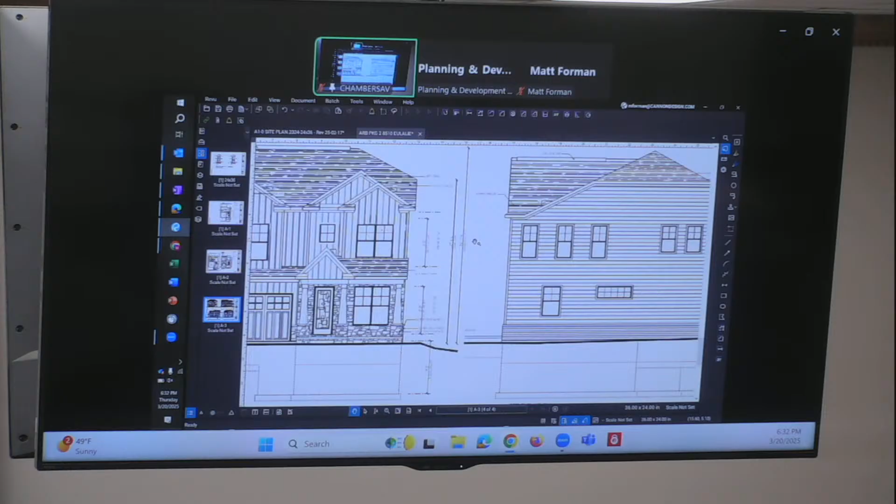So we dropped the second floor height as discussed to 8 foot, reduced the gables to a tapered design, and made some reflections as we discussed last meeting. So that's on the east and west, we got both of those gables - the one in back and the one in front. The one in back stayed high.

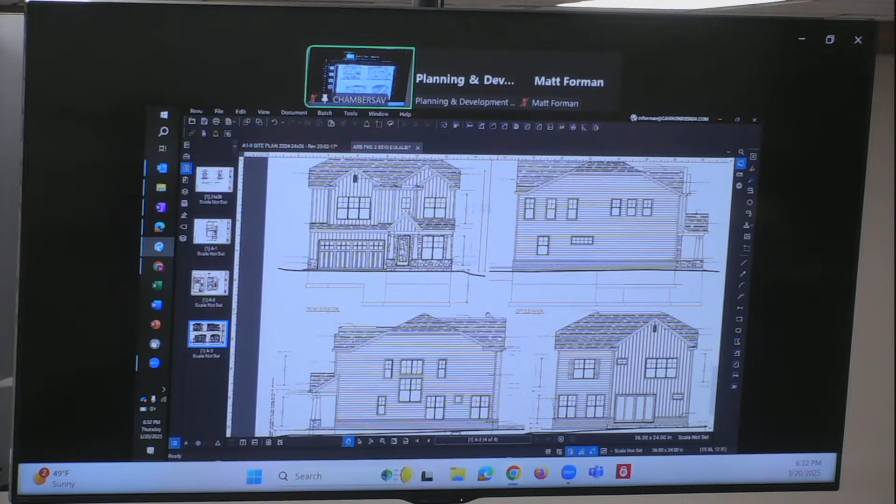I also see it looks like you got the front porch. Right, we even pulled the front porch back in, it's actually pulled back a foot. So I shifted 2 feet back with the back of the building - that whole piece kind of sliced back, so the front projects out a foot, proud of the garage by a foot. Correct. Lovely, okay.

I think where we left off last time - Carl, you might have to jump in on this one - the markup we had, I thought we were at like 29 foot, and you're at 32'10. That is the overall building height versus the...

Yeah, I'm trying to remember, but I think you can go ahead, Paul. But you talked about taking a foot out of each floor and then going from 12 and 12 to 8 and 12, right? Right, the first floor is 9 foot, the second floor is 8 foot now. We took a foot out of both of those, so there's 2 feet removed, and then the primary roof structure was 7.5 over 12, that's been reduced to 6 over 12.

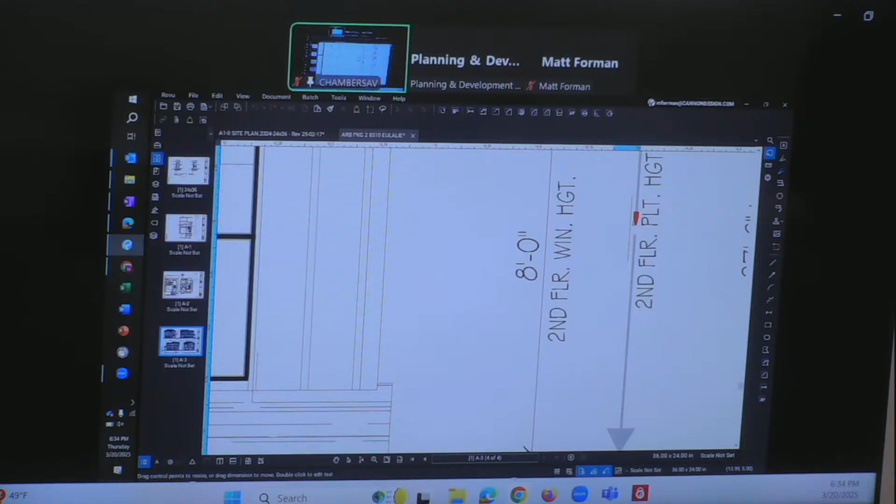Speaking from the side view, it was actually 7.5 over 12, and I just changed that to a 6 over 12. So at the front, the entry's 12 over 12, the gables are 8 over 12 on the front and the back, so the rear porch, covered porch, has actually been removed - it's just a patio now. But that back elevation gable is an 8 over 12, and then the side elevations are 6 over 12, and the clippings are 6 over 12.

And that dimension's graphic - I just slid everything down and then remeasured it. Alright, so it looks like you had a little AutoCAD burp. So the package that Tom had purchased is in Softdesk, a completely different application, so I turned a lot of stuff off that was not applicable. Yes, but we missed the plate heights. Correct, but that's why the overall height's there.

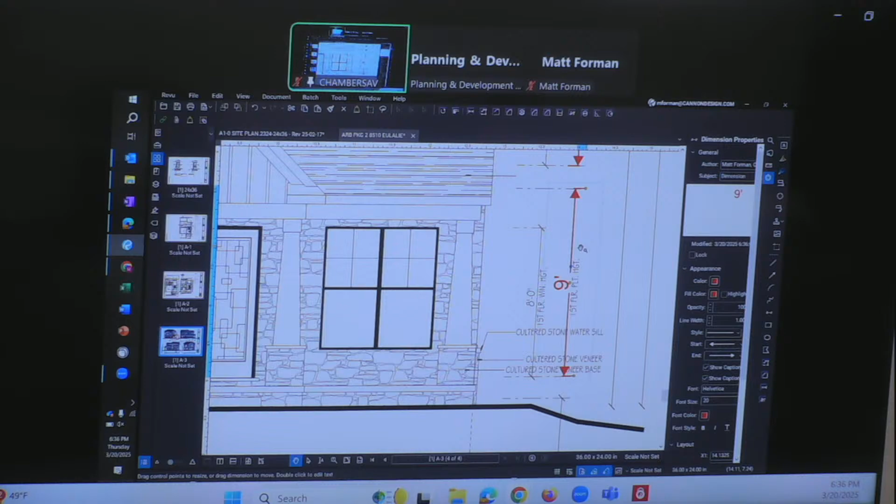First floor is 9? That will be 9 feet, yes. Unfortunately, none of that is actually an AutoCAD dimension other than what I've redrawn. And the second floor is 8 feet. Because I'm still trying to figure out - how did we not get to the 29 foot that was on Carl's markup? No idea.

Yeah, I apologize, I didn't bring it. I guess we could look it up in the file. Thanks. Yeah. I mean, it does sound like the things we discussed have been included.

Alright, let's go back here. I mean, so if what we're talking about is that the goal, understanding that a two-story house is what's going to happen in this location, and we're trying to minimize the impact on the smaller one-story neighborhood context - so the plan was to try to take as much height out of it as possible, right?

And the ways to do it were to change the gables and take a foot out of each level. So you went from 10 and 9 to 9 and 8, right? Correct. So, not being able to weigh in on the measuring discrepancies from software, if those things have been done, then I don't know if anything remains as a possibility to take any additional height out of it.

The driving factor would be the gable on the side, as you said. So if you're down at 6 and 12, I don't know that we would go lower than that with this style of house. Really, that's what drives the peak height, and the datum line that starts that slope is the 9 foot and the 8 foot.

All right, I need a little help, Mr. Turner.

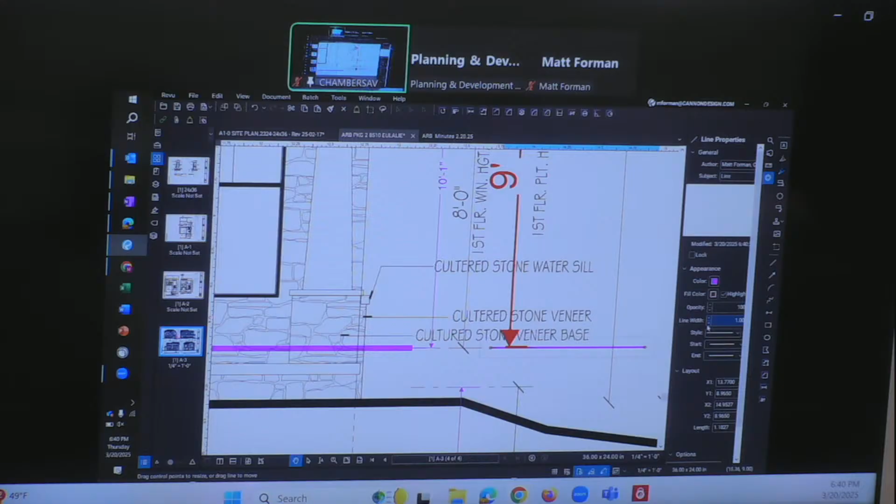The other dimension you measured from could have been from the finished floor rather than grade. When I measured the existing house from grade to peak, it was 15 feet, from the driveway side, which is the existing shorter home, a one-story home. So we're still over double, but when I scale it, I'm getting 9 foot and 10 foot. I'm not sure how much, and if I scale down here, it matches up.

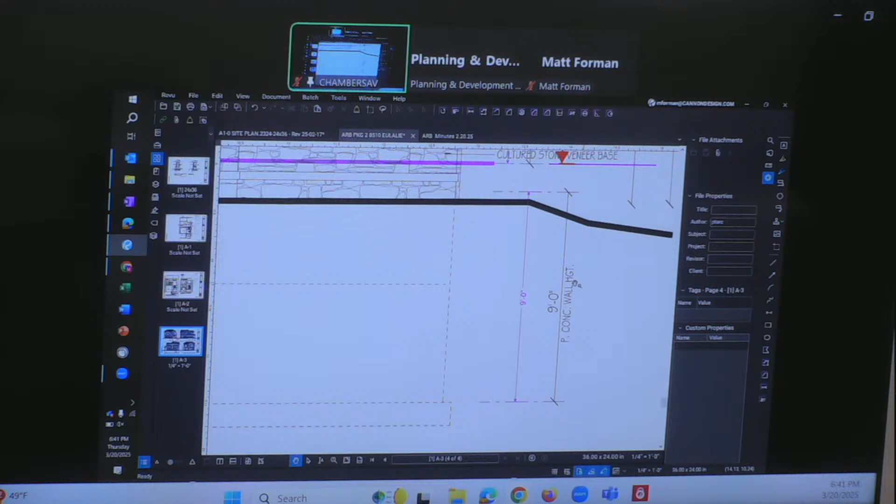And you didn't mess with this one, I'm assuming. Been one of those cases where I moved it but didn't save. But when I check a different dimension properly, that will take it down another 2 feet if that's the issue.

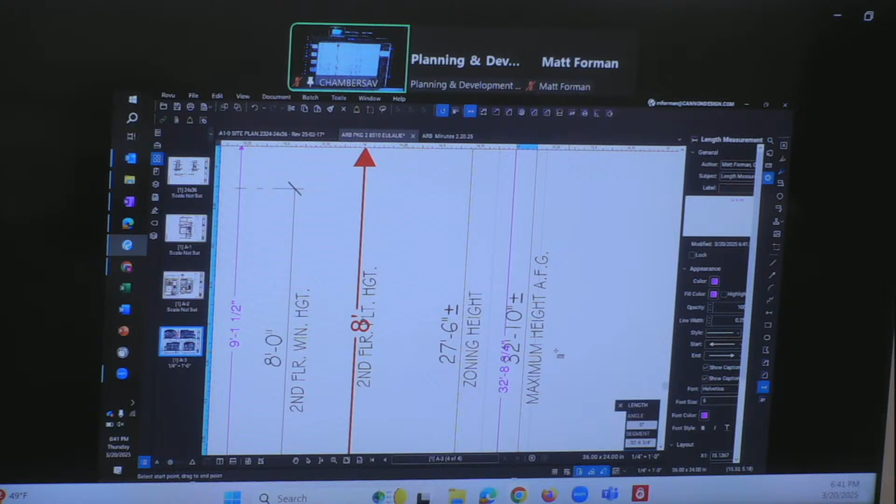Yeah, that's where I'm going. I don't have the CAD file with me, got graphics that aren't necessary, so if I go all the way to the end of that - I think what that did was go up to the top of that. You're calling out 32.10, I'm scaling 32.8, so we're very close. But if this comes down to 8 foot and this comes down to 9 foot, they're intended to be that, we're gonna be at 30 foot.

Can you do a tagline over to the right-hand side elevation? Am I seeing that the front elevation just didn't get pulled down? Yeah, you can go to the very top. You're just trying to make sure those line up.

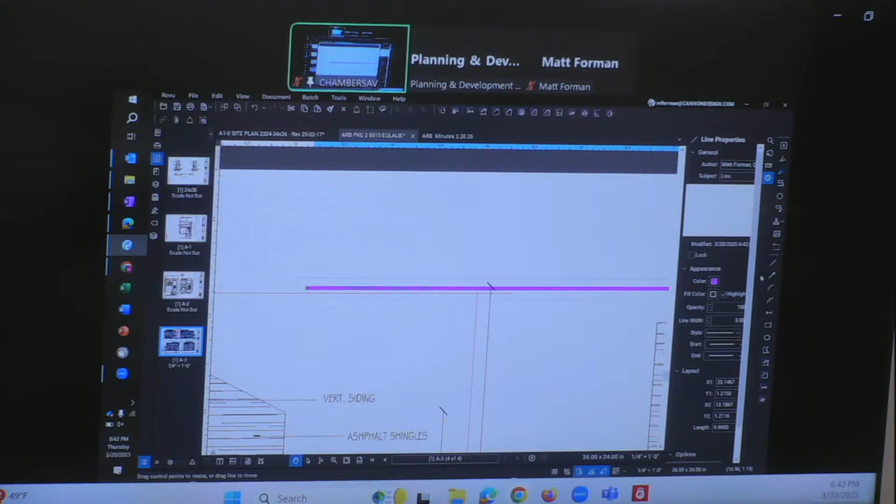Look at the eave line that I have. The eaves look like they're lower, so I'm not quite sure where that is. I'll have to dig through it. But what you're saying is graphically it didn't get depicted, so there's actually still 2 feet to come out of it. Correct.

Without changing the agreement, the intent would be for the 9 foot plate on the first floor, right? That's the back - no, this is the side elevation. You mean from here? The other side over here.

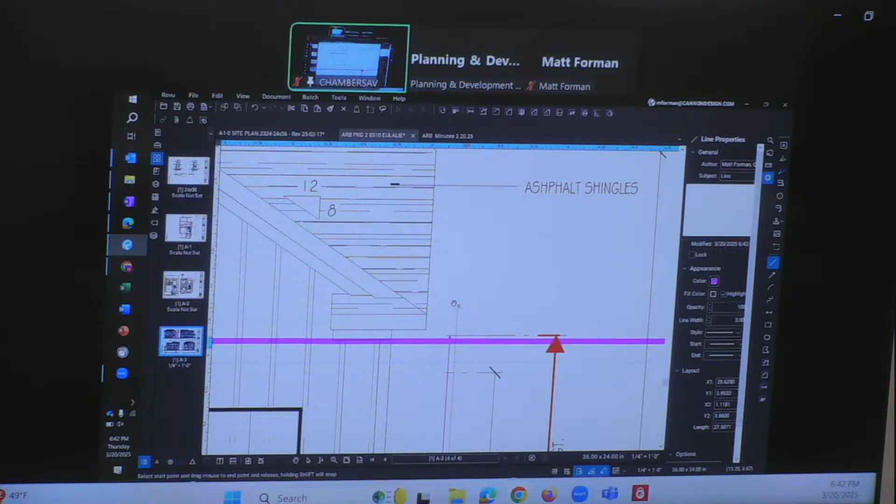Nope. So it looks like there's a graphic discrepancy. There's still some cleanup - we've got the roof plan, we've got the floor plan, we've got good finishes. It looks like we're missing some window trim. Am I wrong? Yes, it appears to be missing.

Should be a 1x wrapped in coil around the windows. Can you repeat that? Should be a 1x wrapped in coil around all the windows. So we tend to go for heavier trim than that. Well, no, he's saying 1x. Oh, like a 1x4.

I am tired, so how wide is that then? Like 3.5? Okay, yeah, all right, sorry. Okay, so we're good. I was like, what? Been a long day, sorry. We should show it graphically because that's fine, this is for the record.

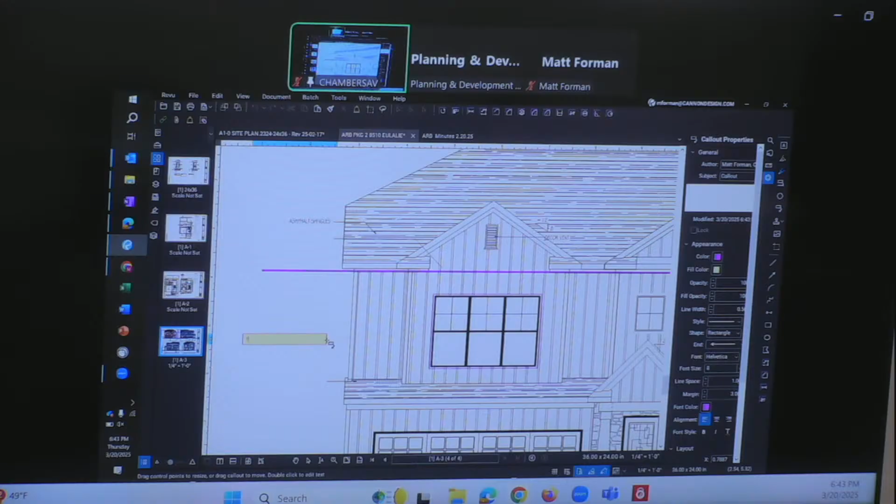All right, so the side elevations to pick it better - 1x3 or 1x4, did you say? 1x4, it's a 1x4 nominal. Does that trim go around the garage door as well? Yes. 1x4 nominal trim, all windows and doors, except for the one in the stone.

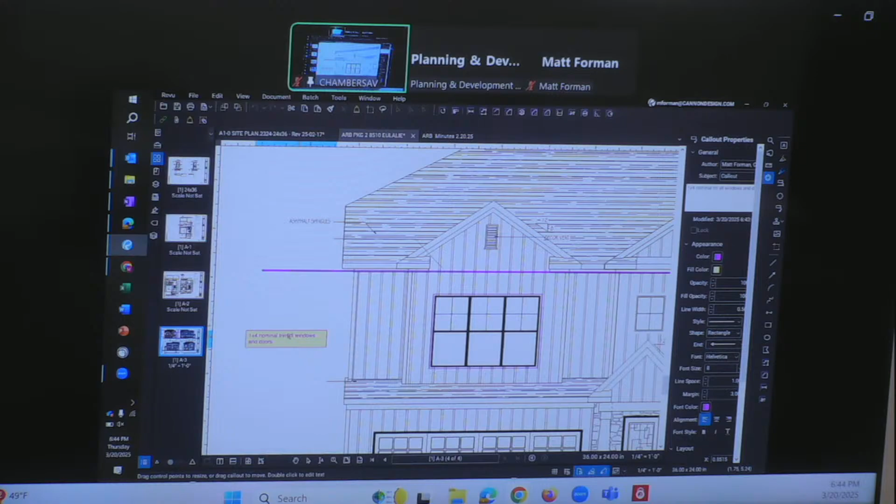Matt, excuse me for one second. The way I'm looking at this plan here with the paper plan, it's kind of small. It looks like this one elevation is 36.4 to the top, the peak of the roof. Is that what you're working on now? That's what we're discussing - we're reaching the conclusion that although the plans got updated, the elevations, graphics, and dimensions don't necessarily match.

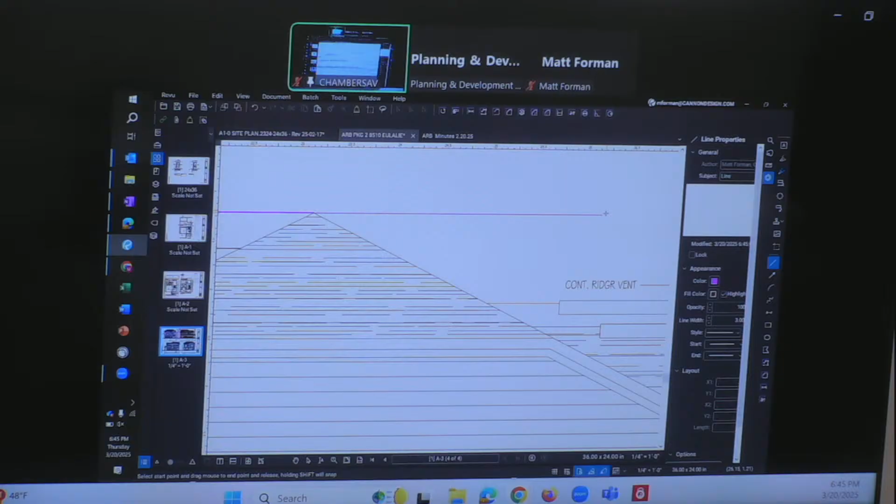So what I'm working on is crossing out some old dimensions and we're gonna call out the plate heights at 9 foot and 8 foot, and that should drop it. Where are you seeing the 36.4? Is that on one of the side left elevations? On A5 left elevation - oh no, that's the overall height, that's the original set, that was the first submission. Okay, great, I just want to make sure we were at the right height, A1, 2, and 3 right now. So if I'm on the uphill side, which is where I originally measured the existing home from the driveway.

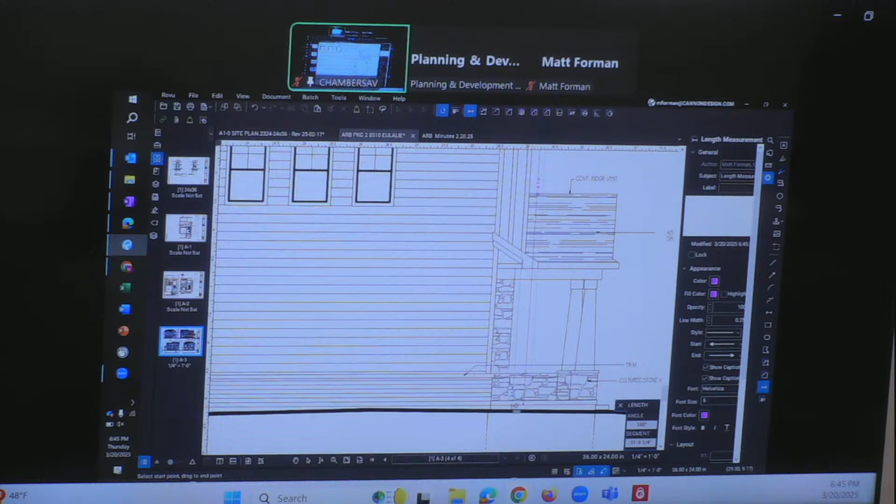What I'm going to do is pull from the peak right there down to right about there. So I'm scaling 31.9 - if we take the 2 feet out, 1 foot each floor, we'll be at 29.9. That was meeting the intent you had in the markup from the first meeting. I believe that was the conversation, yes.

So I think the annotations are gonna - well, you've got trim on the side windows. Yeah, it's on the side elevations and the rear elevations. If you look at it, there's a gap around the window where a line is, either hidden or disappeared. Are you really doing one shutter on the back elevation?

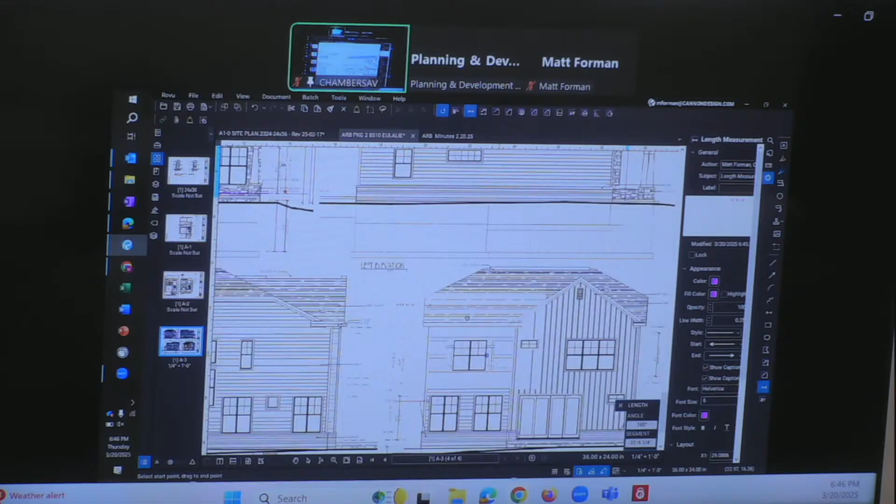No. Shutter Island. No, that needs to come off. Carl, are we making you happy? It's all or nothing with the shutters, I think, right?

And if they're operable, bonus points. Operable shutters, right? Well, we can put them on the second story on the front elevation to match the back elevation. That's your call - that's completely not a voting topic in my mind. It's a style design topic, right?

I think we're making some inside jokes up here because we've talked about window trim a lot, and I've expressed a professionally based but healthy disdain for fake shutters. However, that's entirely up to the builder and homeowner, and certainly wouldn't exclude it from being approved, as it has many times in the past. I have a longstanding wish for shutters to be operable if they're going to be presented - not a requirement, just an opinion.

So with those high winds we had the other day, operable shutters would be a real good thing, right? Be sailing away otherwise. We get a plus or minus on that? Yeah, I mean, we're in the ballpark.

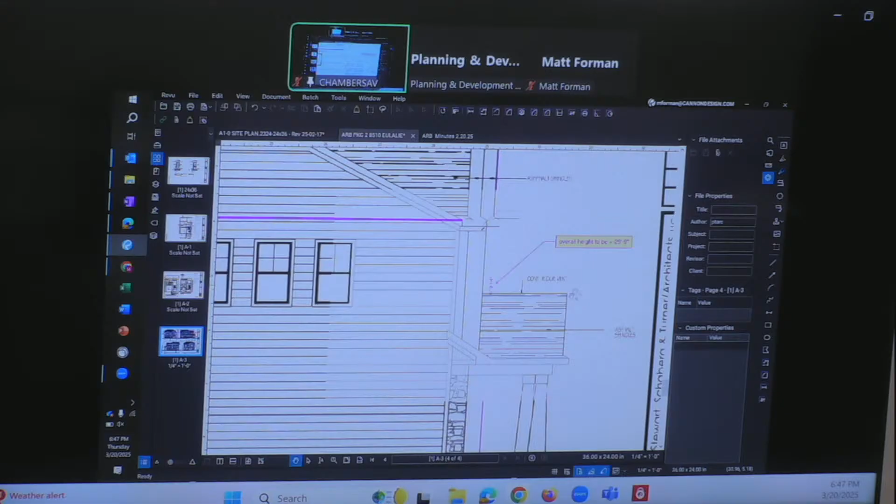My computer - oh, this computer's elderly.

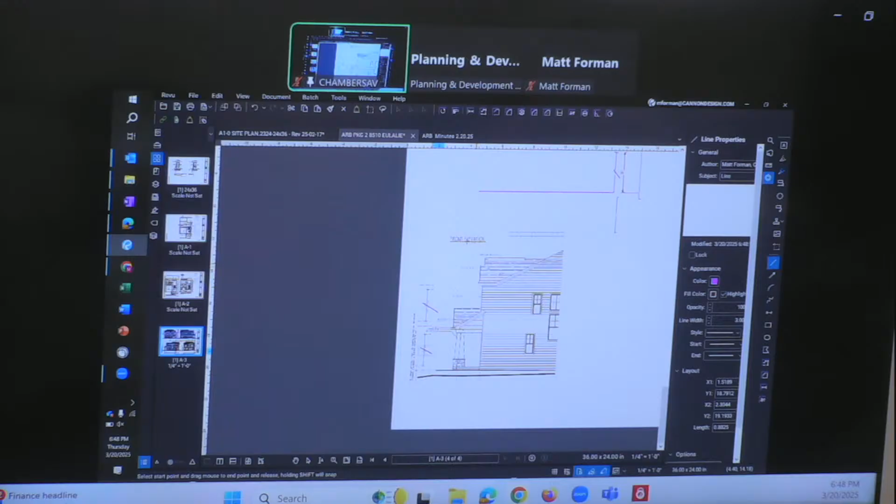I'm just gonna knock a couple of things out here so we don't get confused, and this time I will send markups to staff for inclusion. As I remember, we had materials noted and covered last time - is that in the...

We've made some color changes due to cost and just appearance. So what was revised? The black windows are going to be white vinyl, and the vinyl siding will be gray.

I can't say that I'm upset by that. We've had a number of modern farmhouse submissions, and I think the gray will fit in more nicely on the block. I agree. Okay, roof siding, board and batten.

We know like a light gray, or what do you got? Castle stone is the actual color name. Stone gray. I've got the sample if you want to see it. I'd love to see it.

Because Mr. Turner didn't do fancy three-dimensional renderings. So I think that looks fine. Yay.

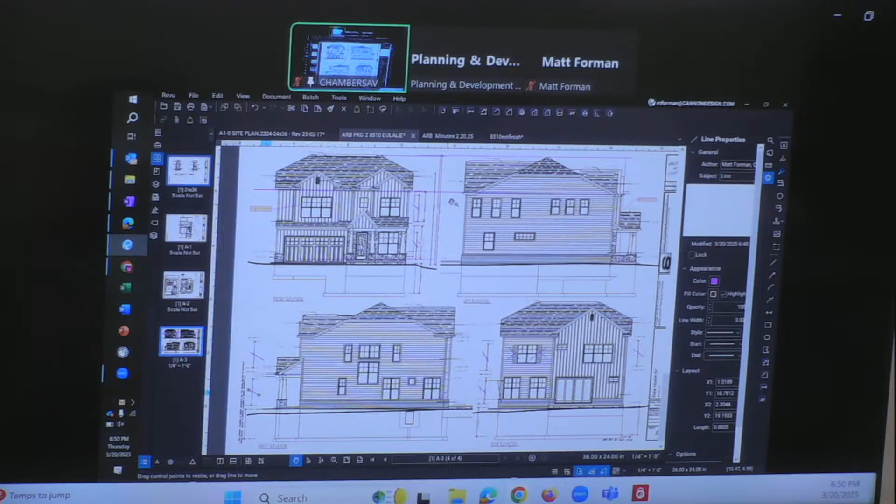All right, so I modified all of those. I need to block these out. Do we have anybody in the digital audience? No one is online that I'm seeing. What about you, Jessica? Do you see anybody?

So, assuming that the number changing process will be complete soon, I would move to approve as noted per this session.

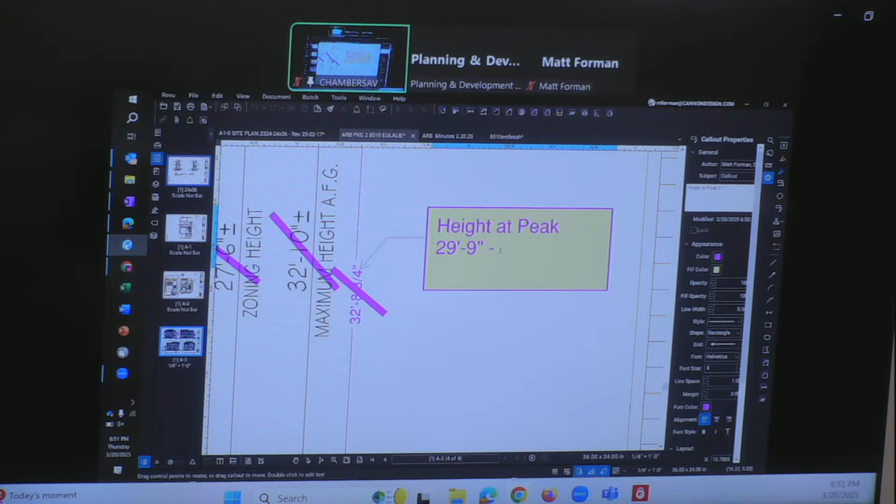All right, so we have window trim all the way around, 1x4 nominal, max height 29'-9" plus or minus, and crossed out all the other dimensions. Floor plan - the foyer's proud of the garage.

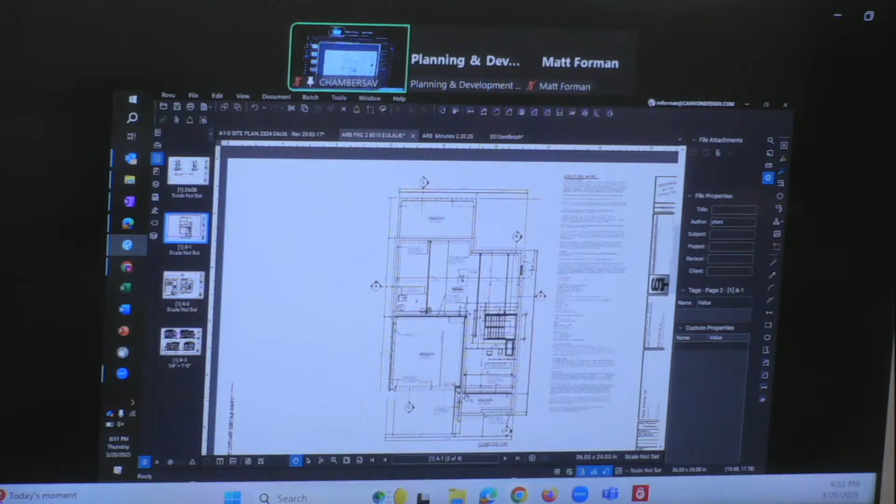Graphics are a little - nope, I think they match - a little weird. And site plan.

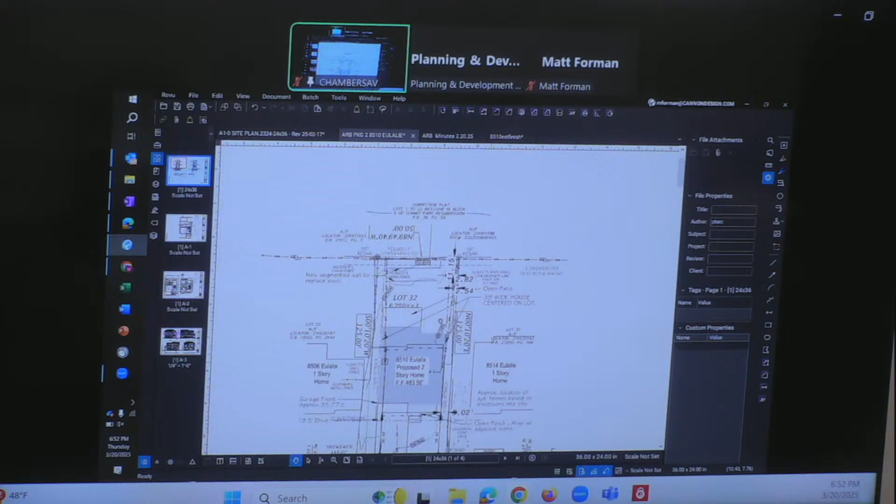So the one thing I did modify with this is to note that the front face aligns with the front face of the adjacent property. That'll be up to the civil engineer to finalize. Where's that annotation? Should be - oh, zoom back in, did it? Oh no, it's going to be on the left-hand side.

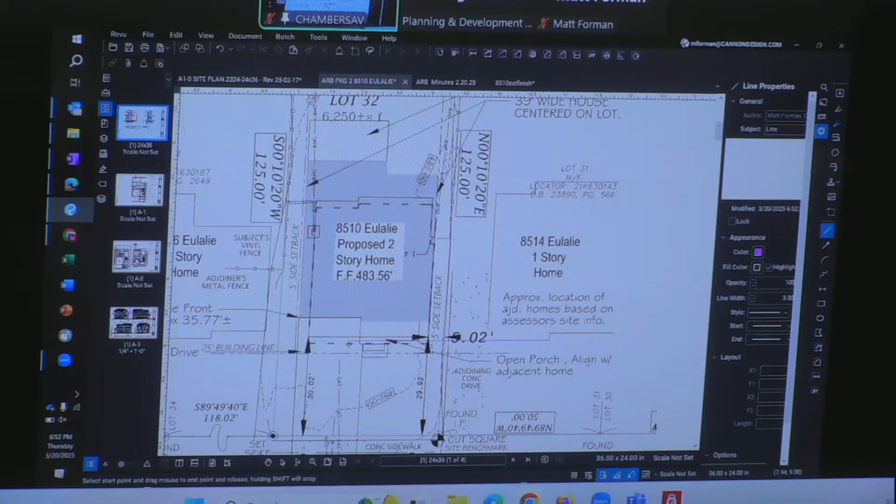Yep, if you zoom in up there - front, align with adjacent home. Yes. Okay, so that's pretty much that alignment. Perfect, okay.

All right, now that I'm done checking things, Mr. Carlin made a motion, I shall second. All those in favor? Carl Carlin, yes. Matt Forman, yes. And that's as noted.

All right, no suspense here. Moving on to the second of Mr. Magee's submissions. I was wondering why he wasn't sitting down, but now I remember. Yeah.

That. Don't have to save that.

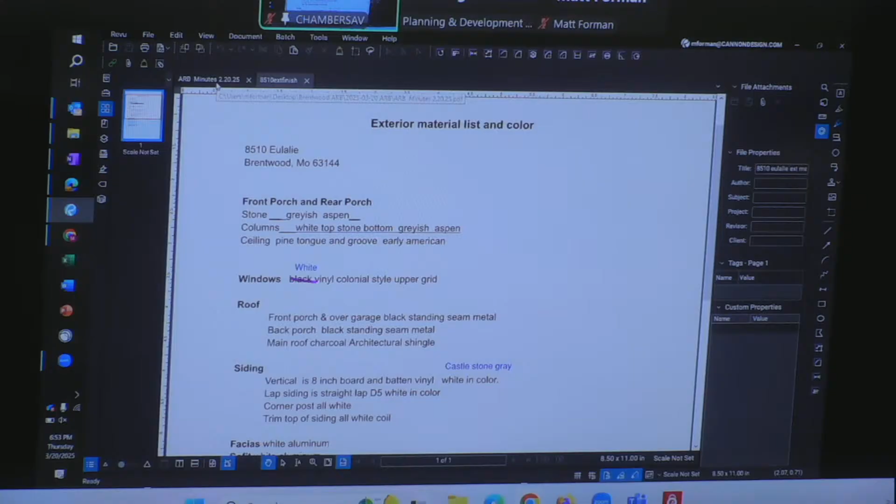All right, which one's next? 43 Middlesex.

Tell us about this one. So we've removed the pool room from the side of the house. We're gonna remove the vinyl siding on that portion of the house as well now and re-brick. Moving the French door from the side to the rear, and then all new windows on that end of the house as well.

Okay, so there's no footprint change? There's no footprint change, there's actually a footprint reduction. So the indoor pool is done rotting the house out and has been removed. Humidity issues? Yes, major.

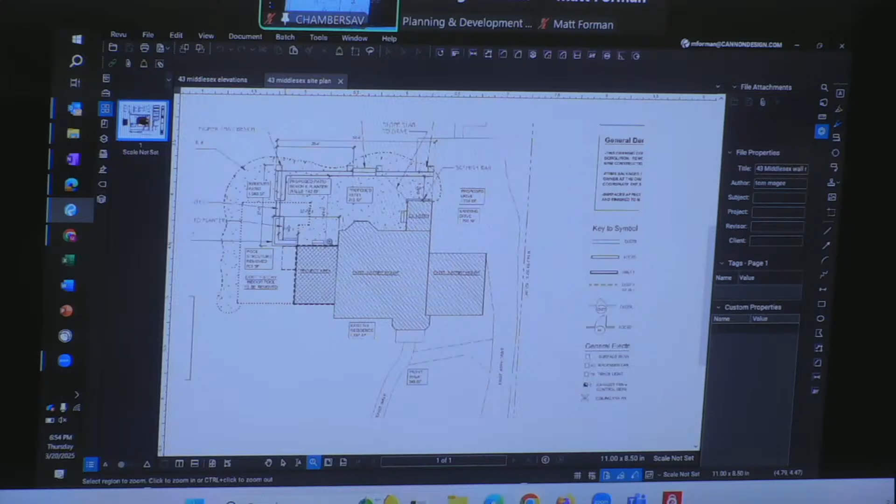All right, so then on the elevations, that's where the pool was. And help me understand, you're taking off the siding and putting on brick? So it used to be an old sleeping porch. It's got the brick columns and brick about approximately 2 foot up all the way around.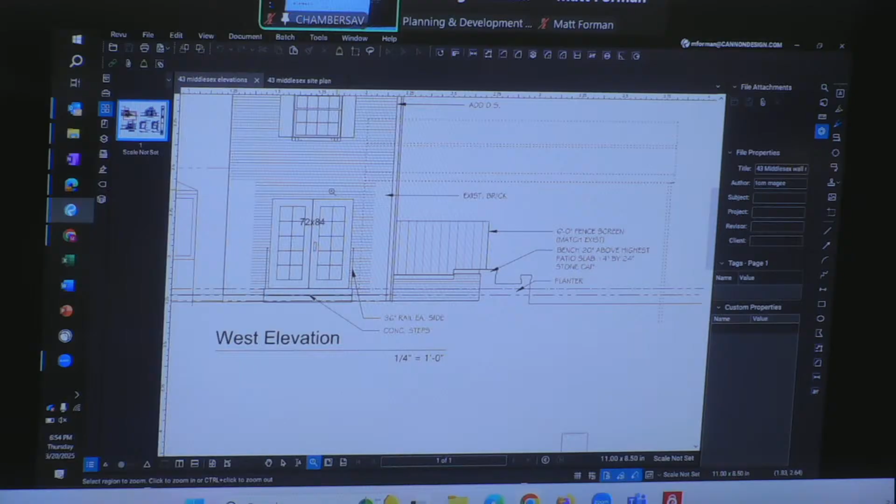So we'll put windows back in where it would have been closed up, and then move the door from the side to the rear, so they'll have new access to the new patio in the back. Got it. HVAC is also going from the rear to the side where the pool used to be.

You're where the old siding was, so this is existing brick? Correct, here there's brick down under that, and then the columns.

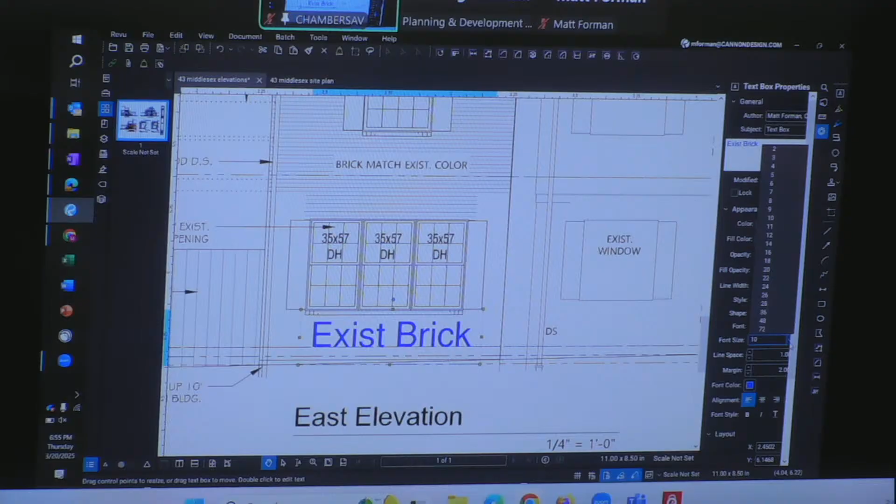I apologize, I had trouble understanding what the street frontage of the house was. Is this the street frontage right here? Yes, that's the street frontage. So does that change the street frontage, or is it essentially the same? I think it's a reduction. Brick is going up instead of siding? Correct. Thank you. And it's painted brick, it'll match the rest of the house.

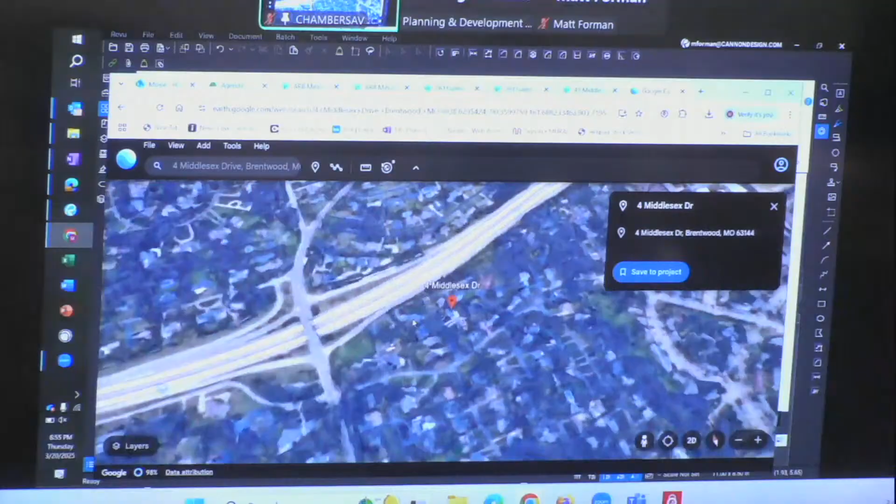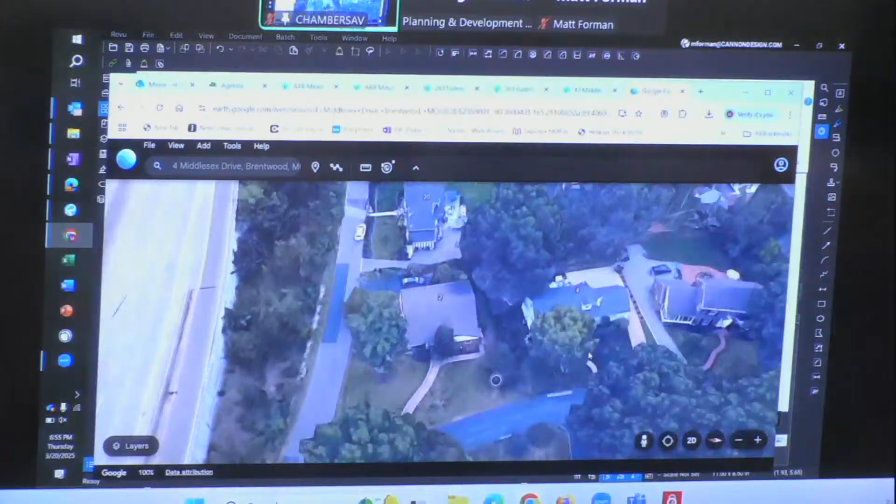There should also be a set of photographs in that submission package. I think they were JPEGs which weren't showing up in my PDF application. Really? They weren't. Well, it is a PDF. Oh, were there? Let me check here.

Middlesex. Yeah, they were JPEGs. Oh, really? So I didn't download them. Oh, I didn't do new ones for this one. Is that right, Tom? Oh, that's right.

Probably, sorry, it's the next one. It makes sense, it's the Salem one. Tom had done the photos back when it was submitted originally.

I don't have any questions, Matt, and I don't think I will develop any. Seems pretty straightforward. Do we have a motion? Motion to approve as submitted.

Do I need the existing brick annotation? I'm not sure we do. Okay, it says to match above, yeah.

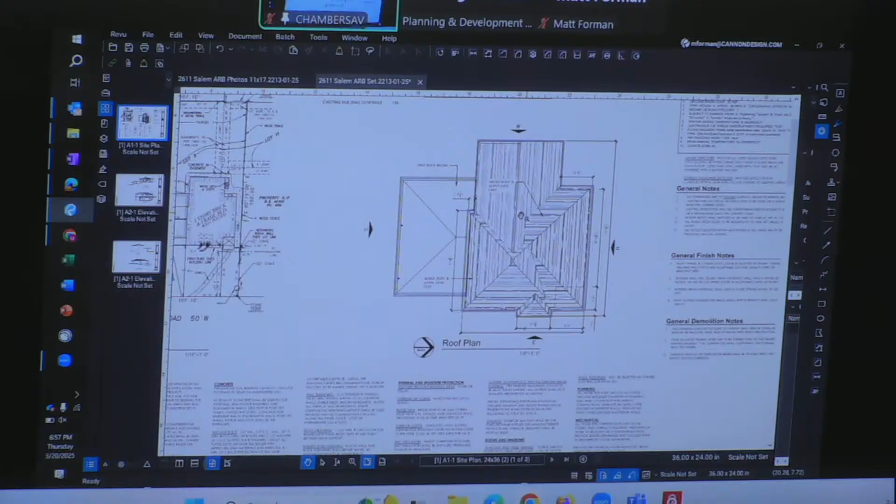Got it. Brick structure, the gutter sits on top of the top course of brick. Oh, this is the one you were talking about. House leaks, and then there's a flat roof over the kitchen, which used to be a garage, we believe.

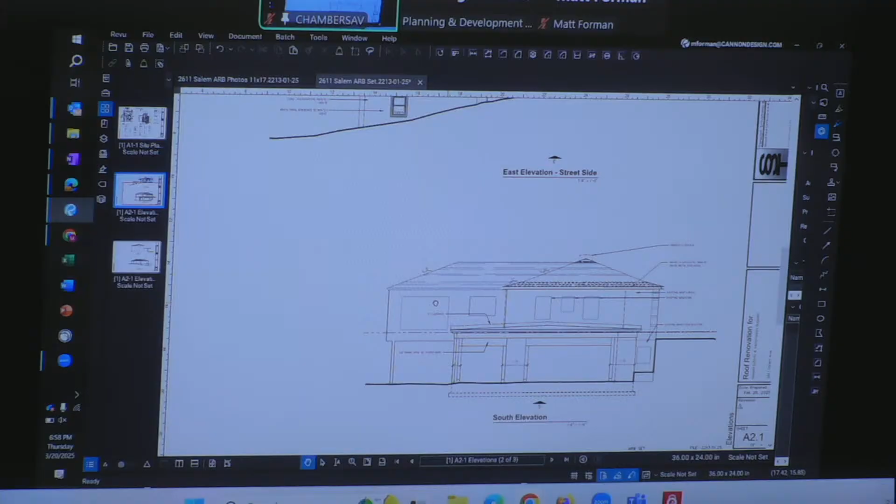So, cutting the roof back and then extending it over to roughly about a 10-inch soffit all over the brick sides, and then a new sloped roof over the existing flat roof of the kitchen with a matching 10-inch overhang. So this roof stays, the back addition stays, it is functioning properly, not leaking.

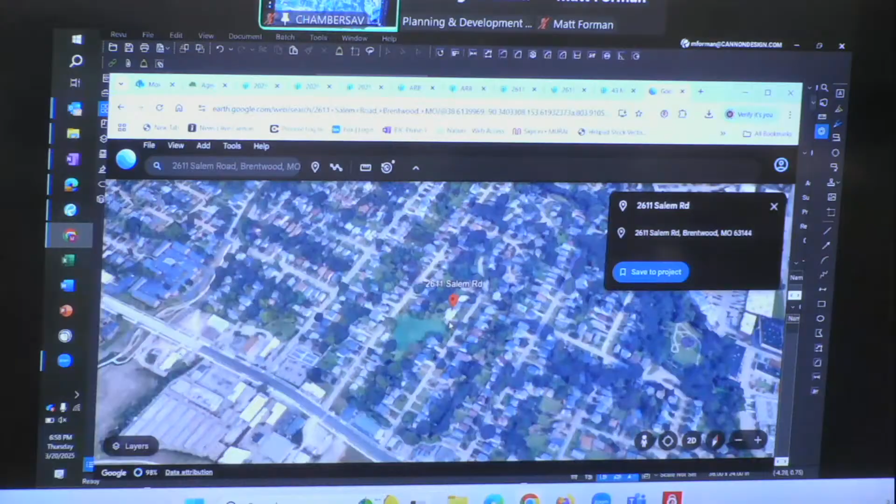And then the dome over the front will be removed, covered up with the new slope of the roof. I think I just annoyed my computer.

Neighboring houses across the street. It's this one, right?

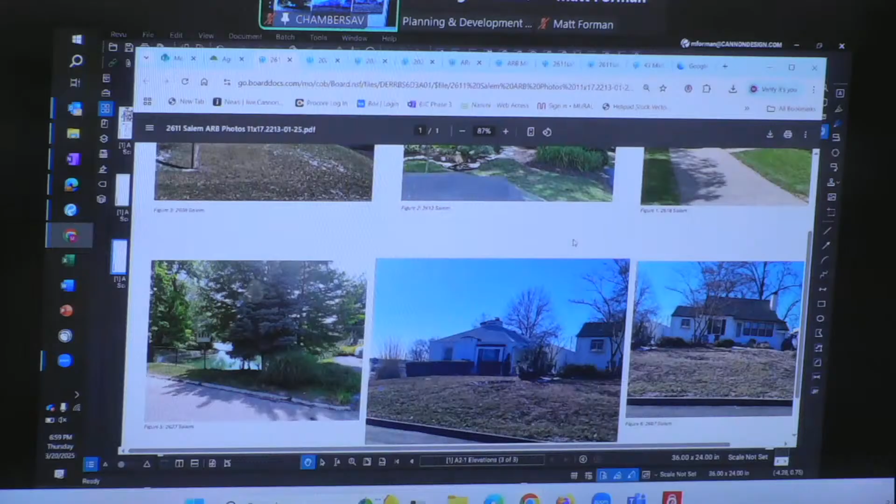I mean, my only thought on it really is that although it is an interesting detail and does make the house sort of stand out in an interesting way, if it's leaking, right? Well, it's not just the detail at the front, it's the whole roof.

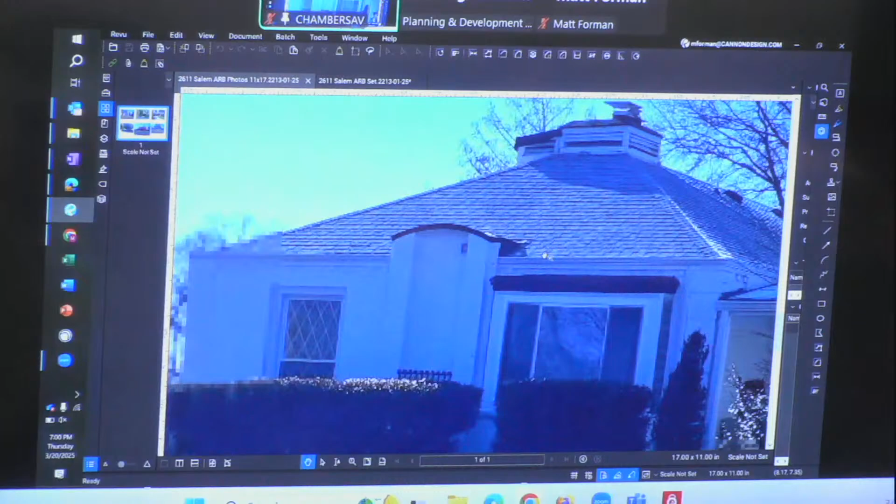I mean, you're not really changing much about the pitch of the roof, and there's an addition on the back that has a more contemporary overhang, right? No, it's flush, it's the same as the new house. The addition is actually flush, whereas this one was held back. It was a gutter, but it's sat more on top, it's more functional.

So is there a reason you didn't explore going flush with this design to match that? This one will at least solve the problem rather than creating another potential problem for the owner. We want to be conservative, trying to attach to the existing brick. I was leery of popping brick and having to remortar a bunch of brick on the top courses.

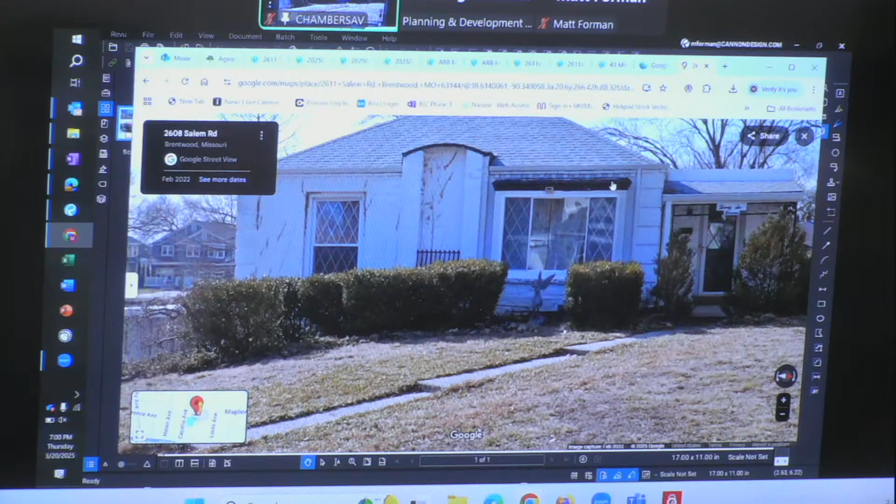The dentils are still staying, you're coming out a little bit. This may be less prominent. There's nominally a second roof structure bump out above that bay window, and then the front porch roof will be flush with the rest of the house.

So currently that's only about a 7-foot clearance on the front edge. That's 7 foot above the grade, actually. It's really short when you walk in.

So this roof is being replaced. This roof back here is staying. It will get all new shingles, but the roof framing structure stays.

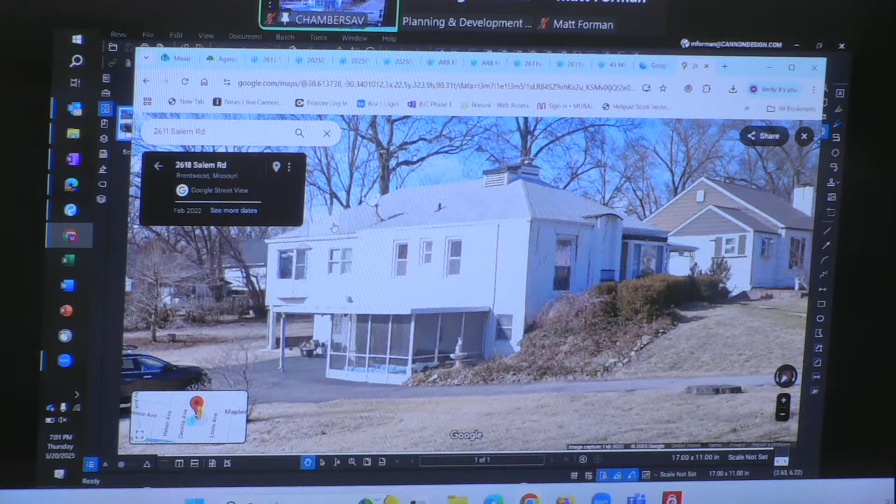And then was there something going on the porch, carport? That was already done previously, it's just Google's not updated. So it's mainly this piece, and then you're gonna work around that. Yeah, and that is actually one of the reasons for the extension, so it ends up being flush right there.

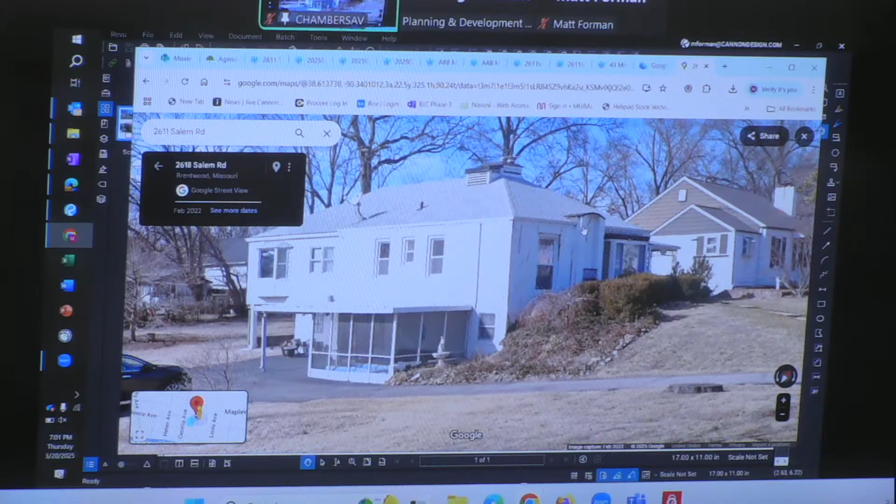Oh, I get it. So the new eave is flush with the face of the brick. It basically brings it forward - the brick is cut down so that we can rest on top of that. And then the roof stays flush all the way across until the bay window, and then the bay window will have a projected hip.

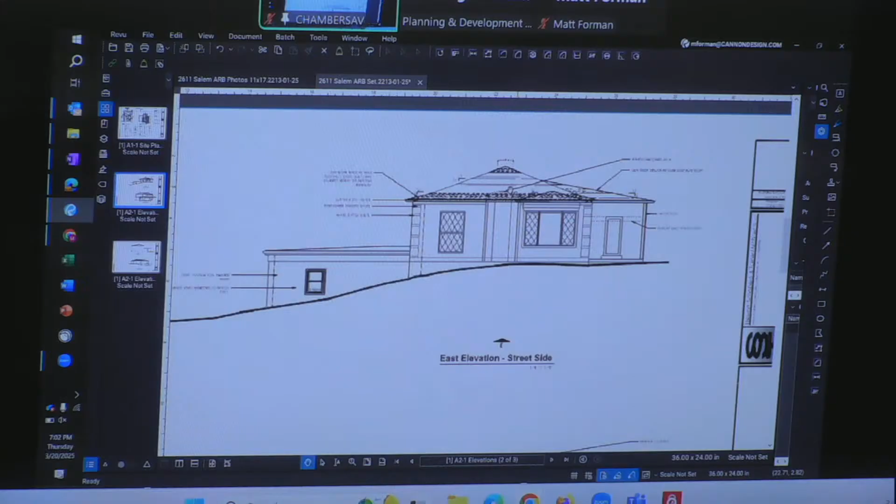Okay, so we're losing the arch on the front. Correct, got it, so that's just going flush. But to Carl's point, is there a little gable? Correct, it's basically a shallow hip, so it's still gonna get some interest there.

Correct. And I'm not sure what to call it, the cupola or the vent collection at the top is also gone. Correct. There may be a hidden chimney someplace in there, but there's no - the fireplace on the inside's abandoned. It's a shame to lose that nice little detail on the front, but if it's leaking...

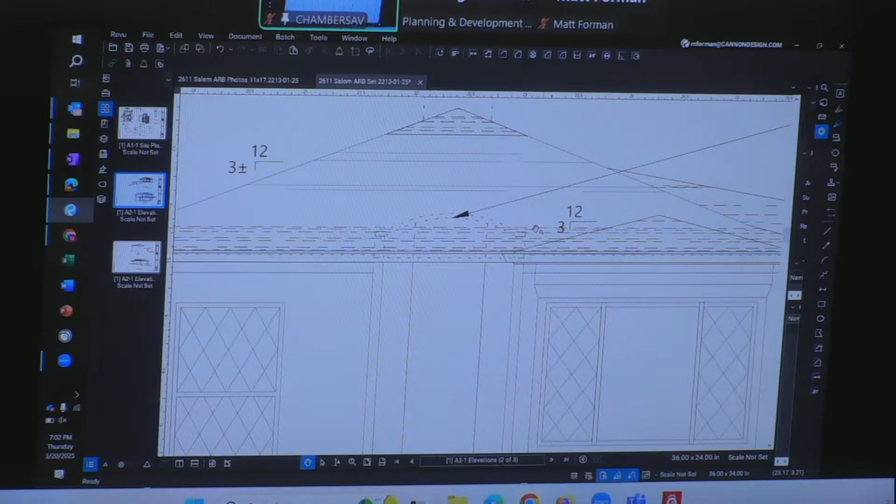Turner finds a magical way to preserve it, but...

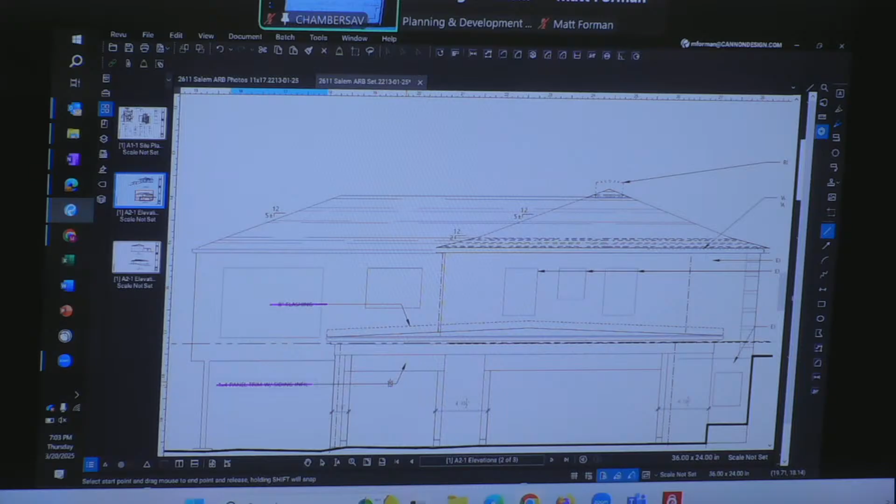And then this has already been done, it's just - that's all existing. How are - is this flashing note correct? That is not correct, I apologize. Okay. Been done, or are you doing - no, the garage was done. Nope, that's all done, sorry.

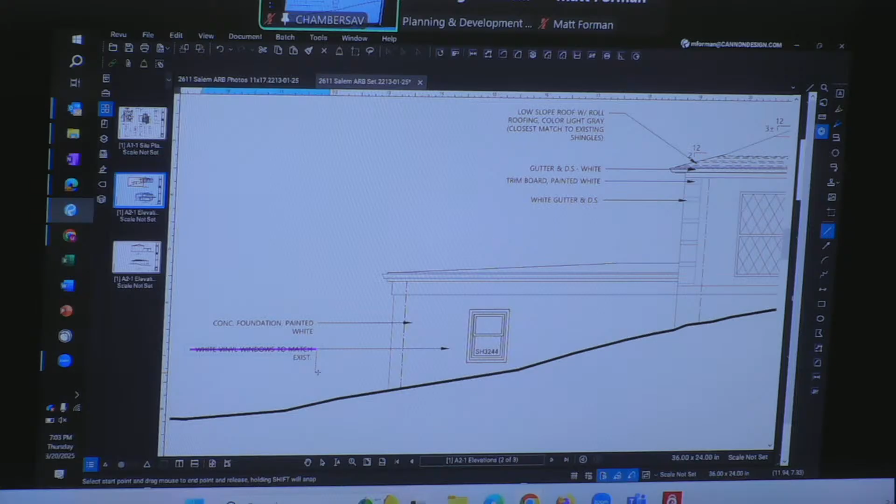Trim, remove cupola? Both existing. Oh no, this is - that's yeah, existing, that's all existing. Oh yeah, it says that one says existing below it, to match existing. Oh it does, you're right. I'm gonna have to fire my proofreader.

What's white post? So on that porch, there's gonna be a post out front. We have to put a new post in. Currently, is there a 4x4 sitting there that's bare? 4x4 or 5x5 post, that's something that's - the vinyl sleeve existing post. Yeah.

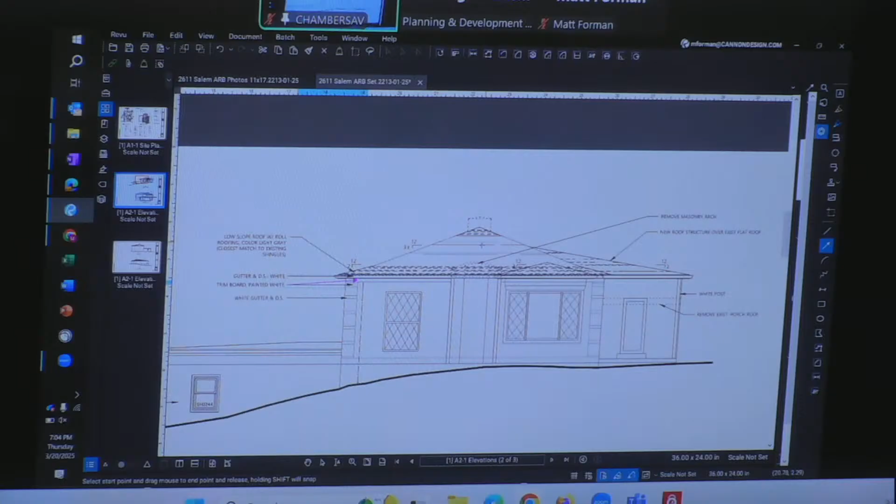All right, so we're now in as-noted territory. Yeah, I think I understand the project, so I could move to approve as noted. Second. Roll call - Carl Carlin, yes. Matt Forman, yes.

Thank you. All right, public comments - we have nobody online and we have no one in the audience. So, building official update from the director.

I don't have anything tonight, except we do have one submission for next month. And then I think we're looking for a time to review the design guideline.

Yes, I believe so. That's, yeah. Says April 7th to 10th. I don't know if you guys are around. I'm actually in town. That, what time? Sometime between the 7th and the 10th. Oh gotcha, Whitney needs to choose a day. Also the gotcha, afternoon. Thank you.

Oh, I'm sorry. They are looking at between April 7th through 10th at 3:30 in the afternoon. As soon as the day has been determined, we will let you know. And will that be at the community center in a public meeting? Sorry, I wasn't privy to that information. Okay, just curious - at 3:30 in the afternoon, it made me curious, so. I don't know, we'll let you know that detail as soon as we have that one determined too.